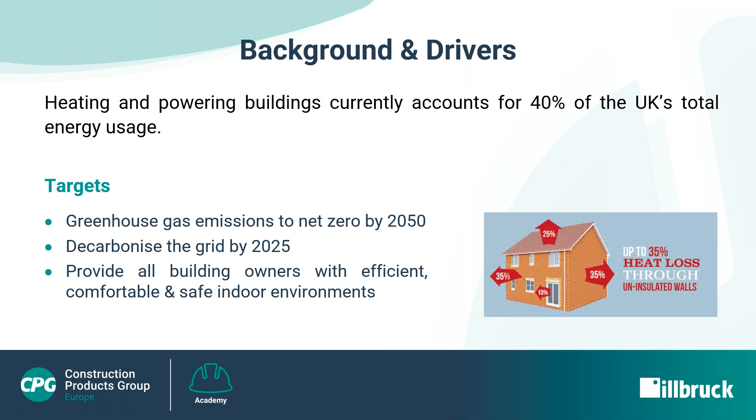The consultation was completed over 12 months ago and addressed the above issues and included the need for the new ADO. The timescale is geared to the 2050 target for net zero. In order to control these measures, the future homes standard for domestic dwellings and future buildings standard relating to non-domestic buildings, existing dwellings and overheating in new residential will be implemented by 2025.

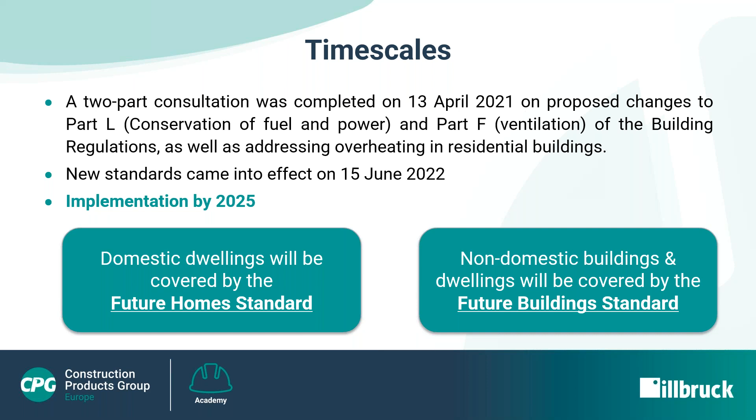The interim approved documents seek to avoid having to retrofit any new homes built during this period to comply with 2050 requirements and to ensure industry is ready to meet the new standards by 2025 and be zero carbon ready. The new ADL requires new homes to produce 31% lower carbon emissions from the 22 implementation compared to 2013 requirements. Ultimately, domestic dwellings are expected to produce 75 to 80% lower carbon emissions compared to the 2013 regulations.

Although new gas boilers are currently still permitted under Part L 2021, all new wet heating systems such as central heating, radiators and underfloor heating must be designed ready for heat pump systems with a lower flow temperature of 55 degrees centigrade. The timescales for heat pump rollout is currently uncertain due to lack of trained installers and particularly the cost of the equipment. There's also the potential for legislation requiring phasing out and replacement of current HFCs used in these pumps much earlier than originally planned.

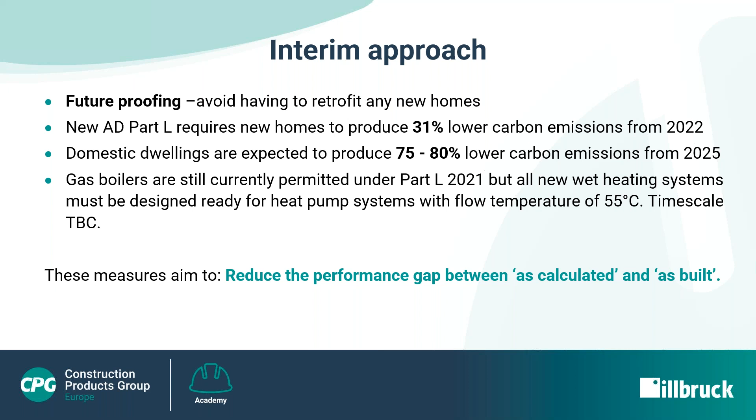These measures also seek to reduce the performance gap between the as calculated and as built, which has up to now led to significant inefficiencies in performance, typically caused by product substitutions and/or inadequate workmanship.

Looking ahead then, the implementation of the future home standard and the future building standard will be by 2025. The new metric for measuring performance under the FHS will be the annual energy consumption in kilowatt hours per square metre per year, with a target of 39 for flats and mid-terraces and 46 for semi-detached and end of terrace. There'll be a concentration on a fabric first approach, not a new concept by any means, but the relevance of this cannot be overstated. We will see the end of use of gas and oil heating for new dwellings from 2025, or more likely later, as mentioned above, as the grid is decarbonised.

Triple glazing will probably be more favoured, however, it will be interesting to see how the glazing market approaches this, as to date, the take-up has been modest, reflecting concerns over additional costs and, ironically, the carbon footprint of 50% more glass. There should be less reliance on bolt-on technologies and the use of inappropriate trade-offs. The design should be appropriate from the start rather than having to consider optional technology at a later date.

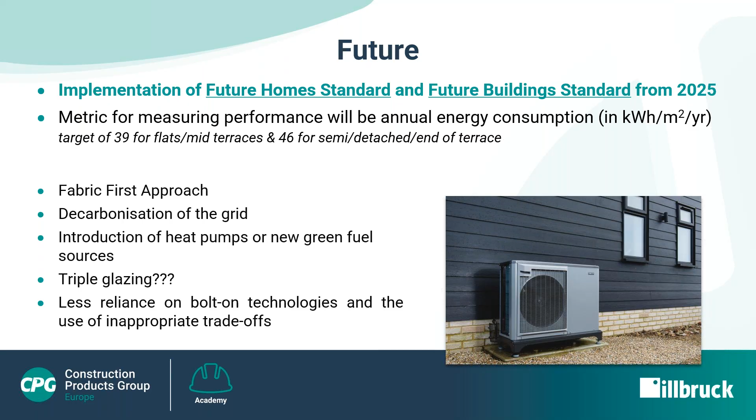Let's look at the approved documents as implemented in June this year. Although all are based on the Building Regulations 2010, they're named as 2021 editions. The new regulations came into effect where notices or plans were submitted after the 15th of June this year. Where plans were submitted before this date, work must commence by the 15th of June next year, with tighter rules on what constitutes commencement. Part F covers ventilation and Part L conservation of fuel and power.

Both are split into two volumes, Volume 1 for dwellings and Volume 2 for buildings other than dwellings. Part F and L cover the requirements for new buildings as well as extensions and renovation work on existing buildings, with some exceptions such as historic or traditional buildings and others. Part F becomes more relevant in terms of ensuring that sufficient ventilation is provided in order to balance the lower air permeability targets in ADL.

New approved document Part O covers overheating and only applies to new residential buildings. This has become more important with climate change leading to higher temperatures, problems associated with more energy efficient glazing, and indeed frequently higher proportions of glass to floor area in new buildings. All of these interact with other relevant approved documents which must also be considered, such as fire ADB, moisture ADC, noise ADE, fuel appliances ADJ, and fixed building services, which is ADK and M.

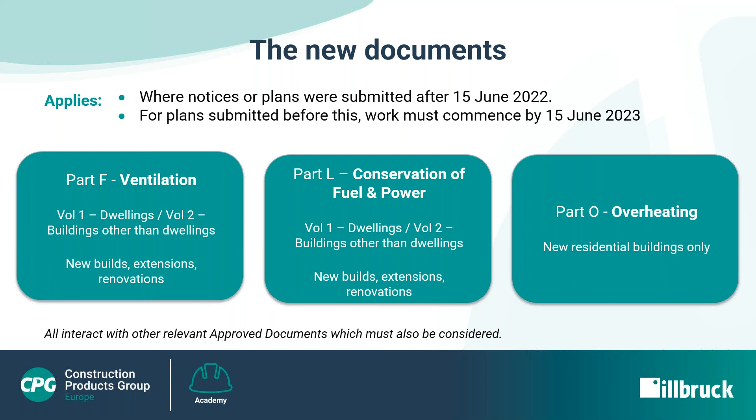The main contractor or developer will need to provide user guides for the building owner, which are clear and non-technical, covering operation and maintenance of relevant equipment fitted to the building. Photographic evidence of the construction for key elements and detailing, such as thermal bridging, interfaces, etc., will be required, which are timestamped with a geographical location. Products which will subsequently be covered within the fabric of the building will need to be photographed immediately following installation.

The issue of a Building Regulations England Part L, or BREL, compliance report will be necessary for every individual building to confirm both the design and as-built performance. The as-built compliance report is signed off by the developer. The photographic evidence and the BREL report is used by energy assessors to produce energy performance certification, known as EPCs. The BREL report is submitted to the building owner and building control department.

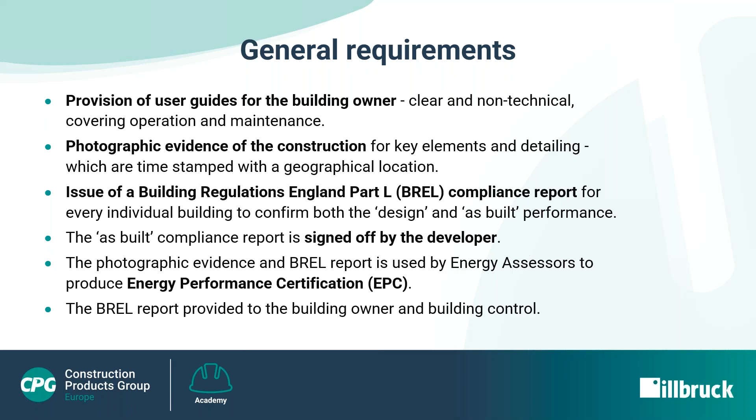So the main focus of this presentation is on ADL, conservation of fuel and power. ADL is issued in 2 volumes, as we heard, volume 1 for dwellings, volume 2 for buildings other than dwellings. New buildings must be deemed to be nearly zero energy. Minimum energy performance requirements for new dwellings are calculated based on the target CO2 emission rate, which is TER, in kilos of CO2 per annum. These are influenced by the fabric of the building and the fuel used for heating.

Target fabric energy efficiency rate, the TFEER, in kilowatt hours per square meter per annum, influenced by the fabric only. And then target primary energy rates, TPER, in kilowatt hours per square meter per annum, influenced by the fabric and fuel. Calculations are carried out using the standard assessment procedure known as SAP for dwellings, or simplified building energy modelling, which is SBEM, for non-dwellings. The actual rates must not exceed the target rates based on calculations at the design and as-built stages.

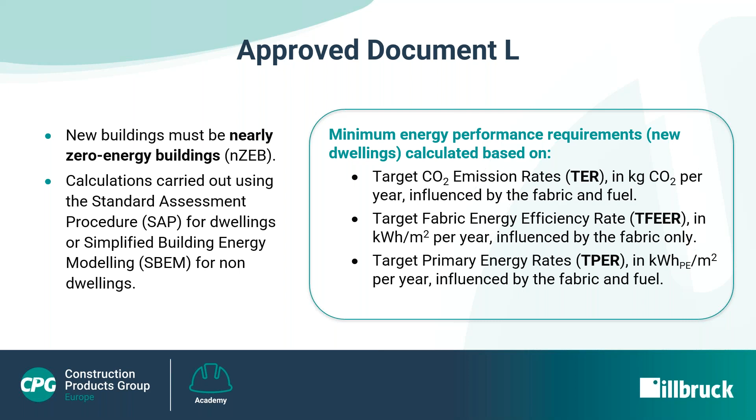The building must be built to a minimum standard of total energy performance evaluated by comparing the actual dwelling against the theoretical notional dwelling for the same size and shape. All individual dwellings are now tested for airtightness at 50 pascals and the introduction of a new pulse test at 4 pascals. There are no additional benefits in the SAP calculations for airtightness levels below 3 cubic meters per hour meter squared. This is to balance with the ADF ventilation. Airtightness below this will lead to a requirement for MVHR. Calculations must be undertaken before work starts using design values and confirmed using as-built information, including details of any specification changes and the measured airtightness values.

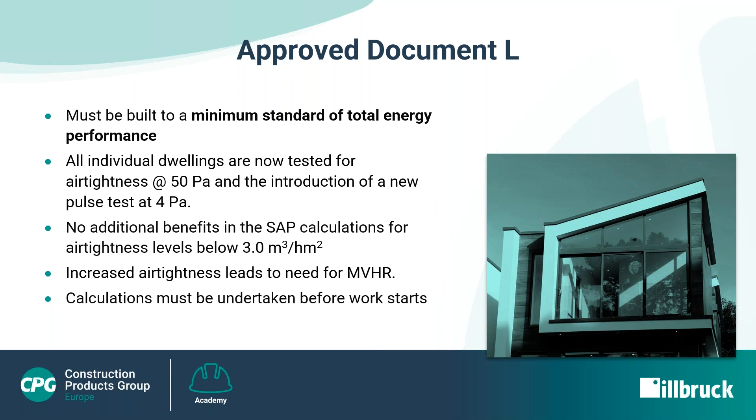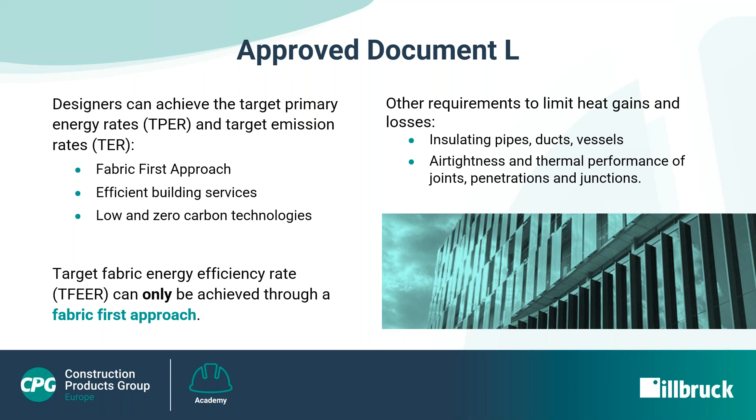Designers can achieve the target primary energy rates, the TPER, and target emission rates, TER, in a number of ways. From fabric energy efficiency, the fabric first approach, efficient building services, controllable and well commissioned to limit the consumption of fuel, low and zero carbon technologies such as solar, wind, water, geothermal and biomass. The target fabric energy efficiency rate, the TFEER, can only be achieved through the performance of the building fabric, i.e. fabric first approach. Other requirements exist to limit heat gains and losses, such as insulating pipes, ducts, vessels for space heating and cooling, and hot water services. Also from heat loss through the fabric, including airtightness and thermal performance of junctions, penetrations, and interfaces.

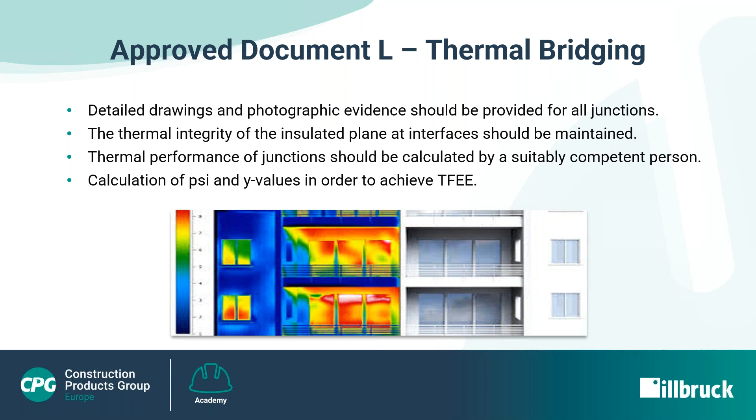The building fabric, including windows and doors, should be constructed so that thermal bridging is limited and detailed drawings and photographic evidence provided for all junctions. The thermal integrity of the insulated plane at interfaces should be maintained. The thermal performance of junctions should be calculated by a suitably competent person, and it will not be feasible to use default Y values. The calculation of specific psi and Y values will be necessary to meet the TFEE.

In improving airtightness, the aim is to reduce unwanted heat loss through air infiltration, for example, via cracks, joints, and penetrations. When installing windows and doors, these should be well fitted and reasonably draft-proof. The tolerance around a window or door unit and the surrounding openings should be minimal, and an insulation material of low thermal conductivity used to fill the gap. BS 8213-4 is a code of practice, which includes guidance on this.

As stated in ADL, to ensure continuity of the air barrier, window and door units should connect to the primary air barrier and should be taped to surrounding structural openings using air sealing tape. Compressible seals or gun sealant may be used to supplement taping. Vapor control layers should be overlapped and be taped at junctions and edges, for example, continuity of the main AVCL and the window interface. Drawings should detail the position, continuity, and extent of air barriers. On a plan of a building, it should be possible to draw a continuous line around the building envelope to define the airtight line.

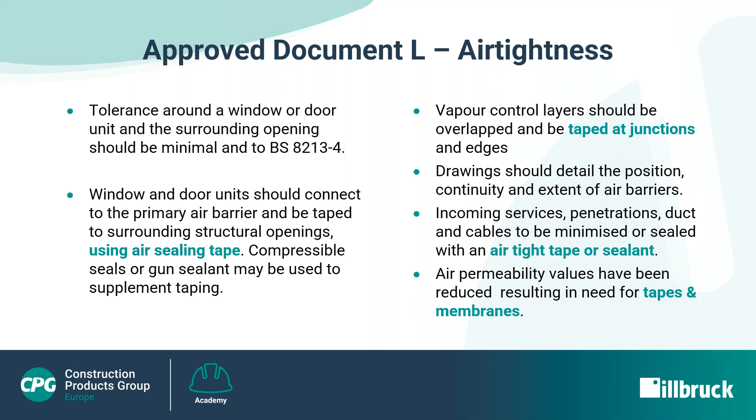Incoming services, penetrations, ducts and cables to be minimized or sealed with an airtight tape or sealant. And there's been a reduction in air permeability limiting values from 10 to 8 cubic meters per hour meter squared, which is still relatively easy to achieve. But in reality, it's more likely that the notional value of 5 cubic meters will be applicable, resulting in the need to use tapes and membranes. This table shows limiting values in the previous ADL and the revised version. The U values for windows and doors have reduced from 2 to 1.6. The reduction in air permeability is also shown from 10 to 8, as we've just heard.

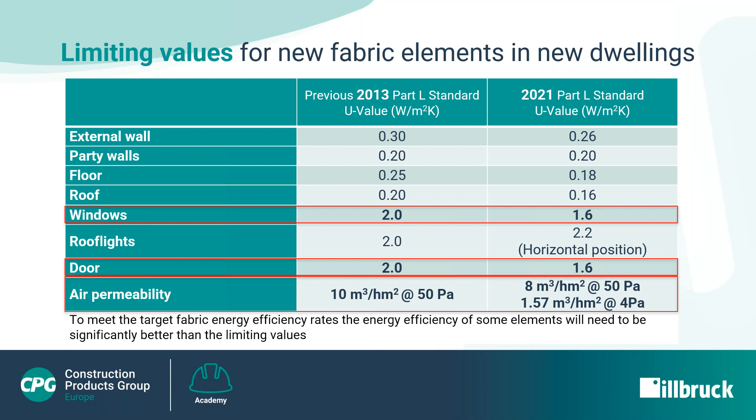The notional building figures are indicated here, where we see the lower air permeability, even lower at 5 cubic meters, and the U values for windows gone down further to 1.2, with indicative FHS requirement of 0.8. Clearly, these are significant reductions.

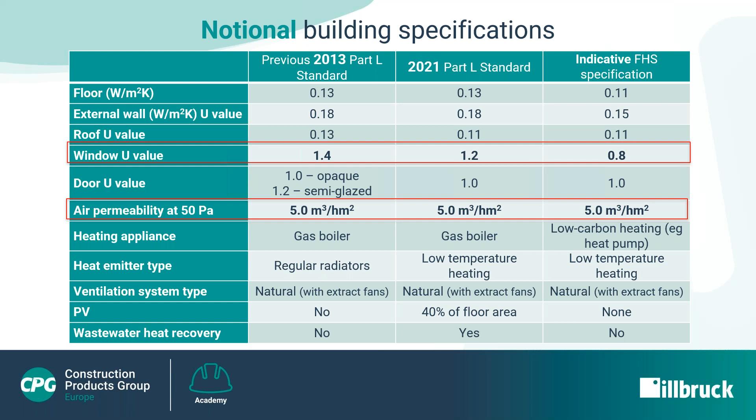Now we can look at which CPG products are appropriate where the requirements of the new ADL have to be met. The illbruck, Dryvit and Nudura brands provide wide-ranging solutions for compliance.

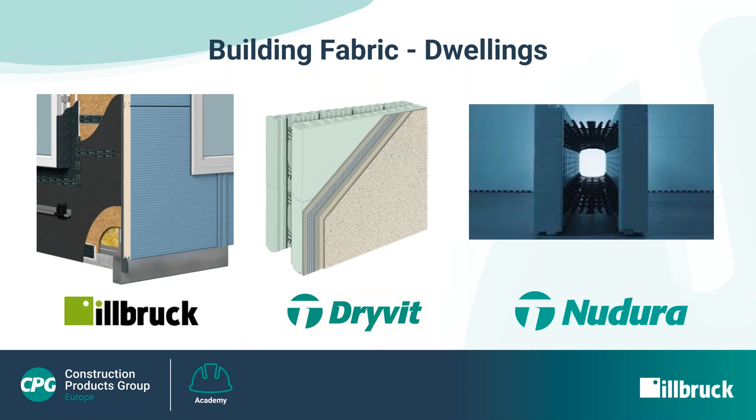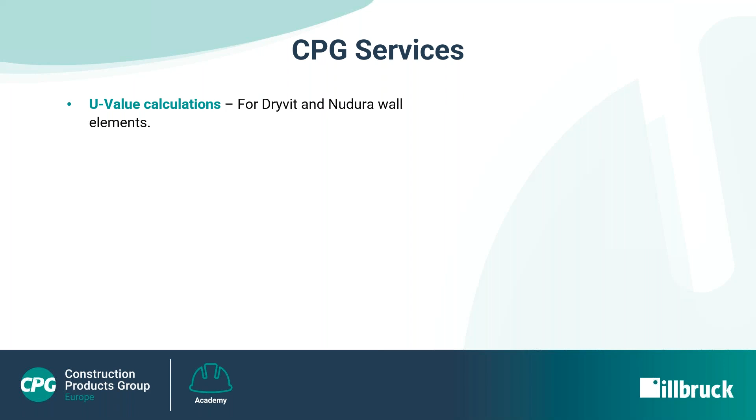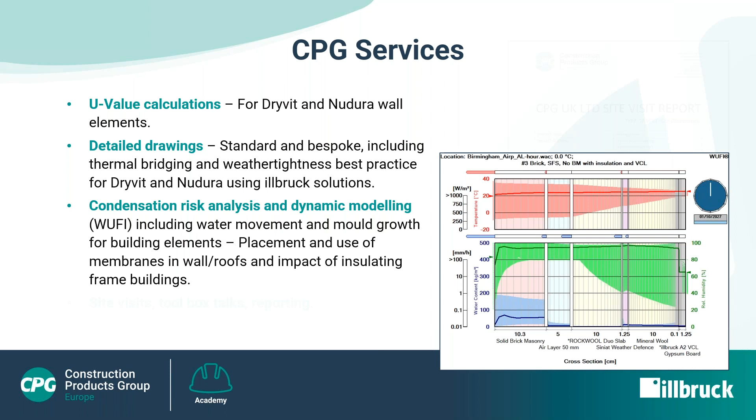But before we focus on product, it's worth noting that CPG offer a wide range of support services, starting from the design stage with U-value calculations and marking up a detailed drawing showing the appropriate location of products. And we can also offer condensation risk analysis via WUFI modelling. When on site, toolbox talks are arranged to ensure full training in the application of products, and site visit reports are written and circulated to relevant parties.

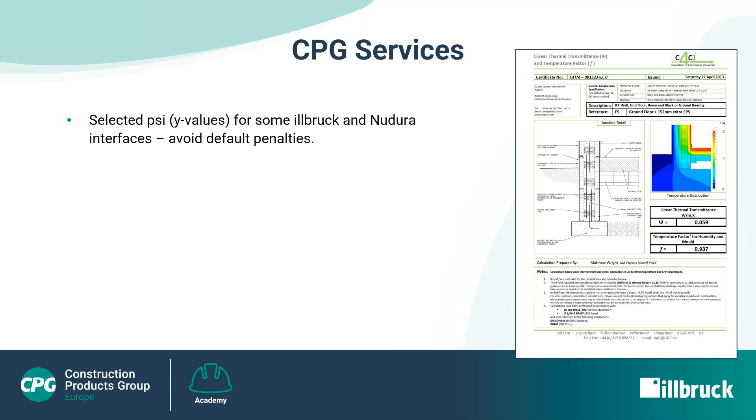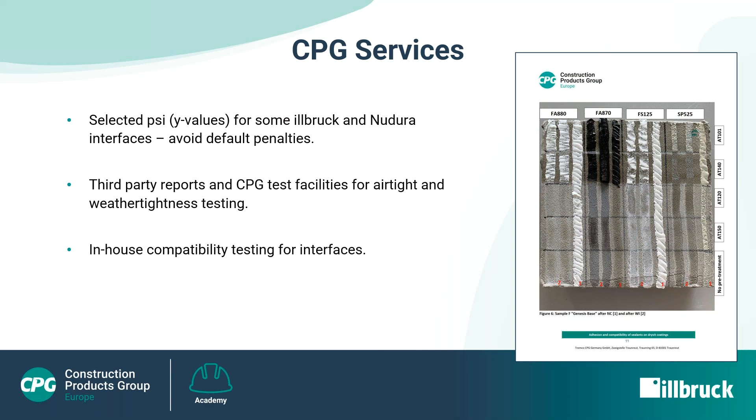We can calculate product-specific psi values to be used in SAP calculations and avoid using lower performance default values. Third-party air and weather tightness testing, including CPG products, is regularly carried out, and we can advise appropriate preparation and correct installation to avoid issues. We also have similar facilities in-house, allowing bespoke applications or R&D to be supported. The Dryvit maintenance guide for EWIS is an example of the documentation which supplements the technical data sheets and website information.

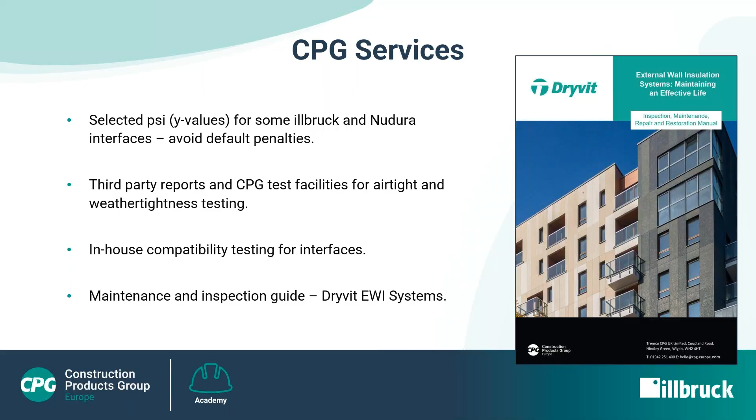And now we can look at some of the illbruck product solutions. From the facade itself, where breather membranes and vapor control membranes are required, to the interfaces at windows and doors, the continuity of the required seals are ensured by the use of illbruck products. The i3 system provides a 3-in-1 perimeter seal, including weather and air tightness and insulation. The use of well-proven products like impregnated tapes and foams enhances the thermal properties of window joints and prevents thermal bridging. Further products are in development, including Class A2 and B breather and AVCL membranes.

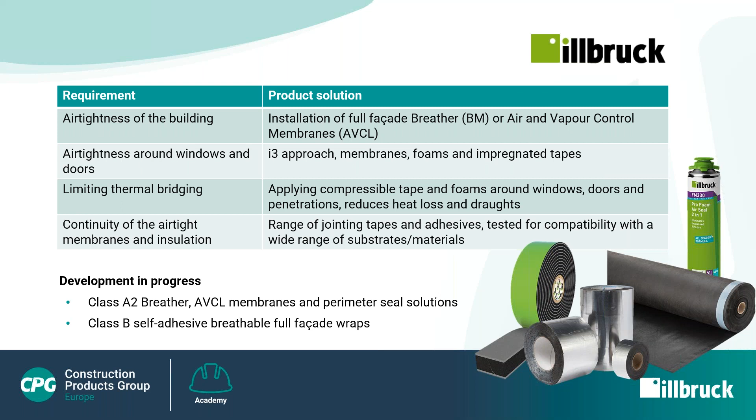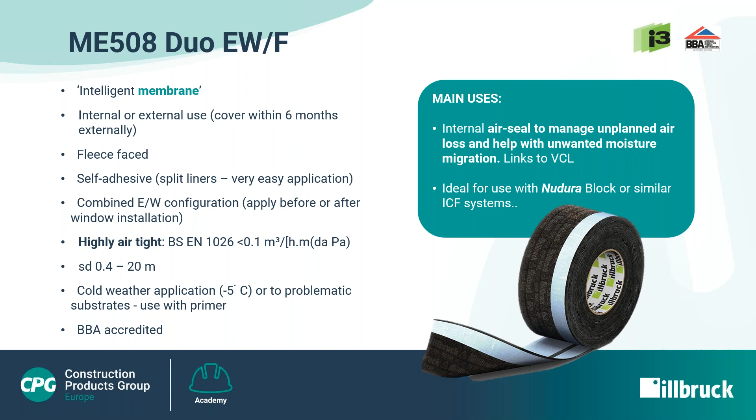ME508 is an example of the type of product which is now recommended in ADL and ideal for sealing the internal perimeter of windows and doors. Application is easy using the self-adhesive backing and split liners. ME508 provides air tightness well below the required levels and is easy to apply and has also BBA accreditation. Here we see some applications of ME508 in conjunction with other products such as ME003 vapor barrier and ME317 internal membrane tape.

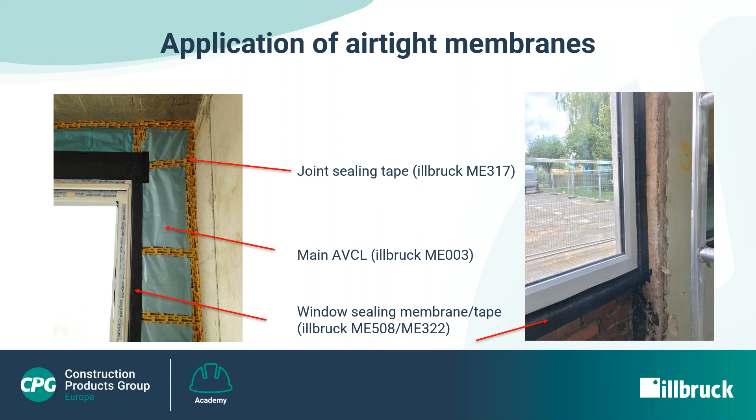Where compliance with ADB fire safety is applicable, ME480 provides a solution for the internal airtight seal, which is also Class B and complies with the reaction to fire requirements. This membrane is fully self-adhesive with a butyl backing and has an aluminium foil finish, which provides a water, air and vapor tight seal.

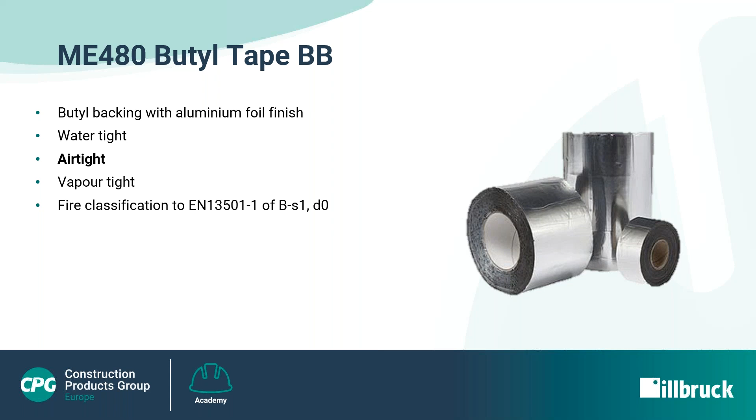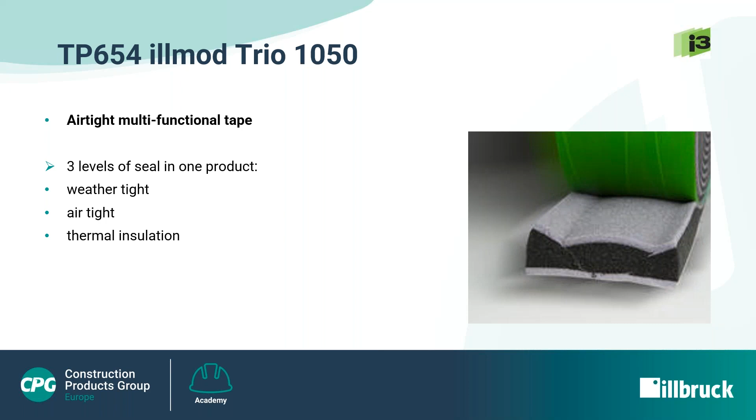Air tightness around window and door perimeters can also be achieved in combination with weather tightness and thermal insulation in one application using TP654 Trio. This is a variation on the illbruck i3 system concept. TP654 provides driving rain resistance up to 1050 pascals, combined with a high level of air tightness and insulation, both thermal and acoustic. It's possible to seal gaps from 6 to 25 millimeters with just 2 sizes.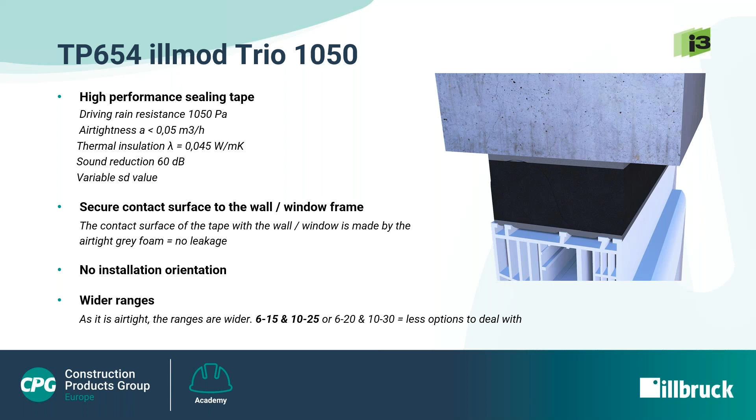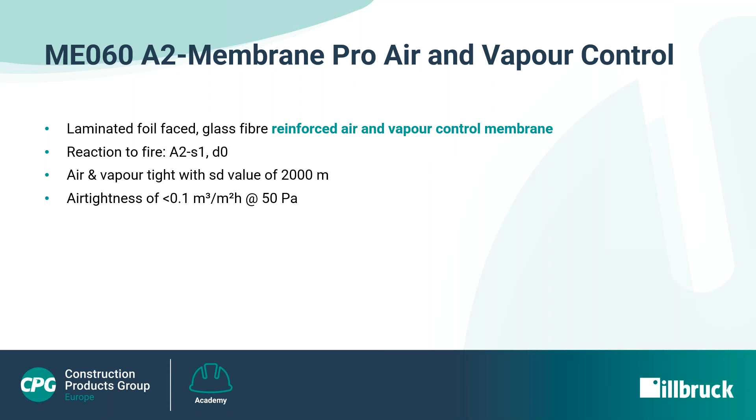For a full AVCL application and in compliance with ADB, ME060 has the required performance, being class A2-s1,d0, with an extremely high vapor resistance and very low air permeability. ME322 is an air and vapor tight tape for sealing window and door interfaces and linking with the AVCL to the internal wall.

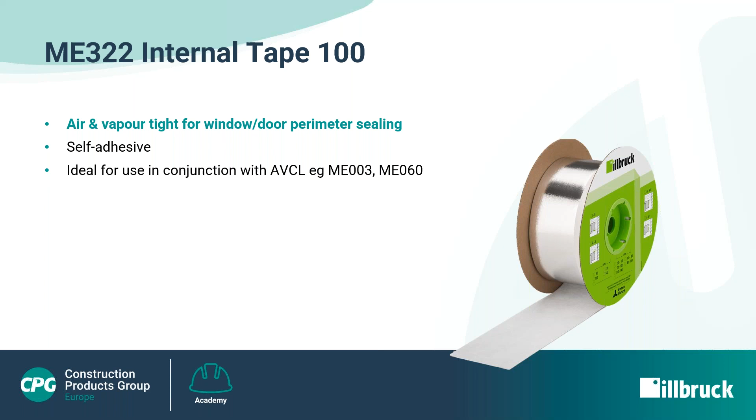Dryvit EWIS are perfect when adopting a fabric first approach for both renovation and new build. The U values achieved meet the new ADL and the FHS. The Roxsulation Pro system is ideal in meeting the need for increased insulation thicknesses, resulting in lower U values.

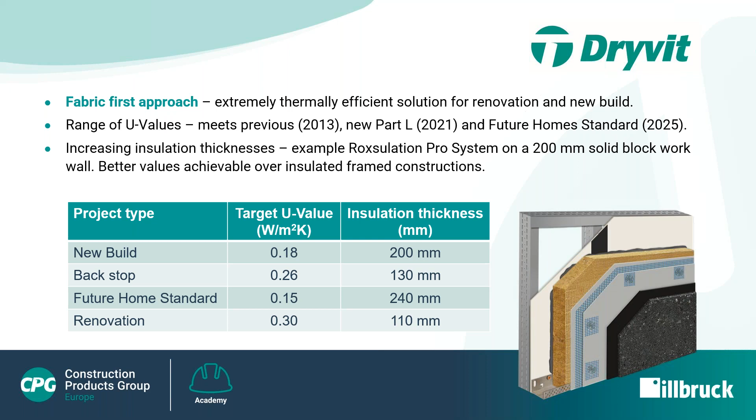Again, the fabric first approach is achieved by Nudura ICF systems, where the new U value for walls is met for both limiting and notional specifications. Similarly, the new air tightness requirements are achieved with less than 3 cubic meters performance, comfortably under the new notional target of 5 cubic meters. In order to meet the more challenging FHS U value requirement of 0.15, a new thicker block is in development.

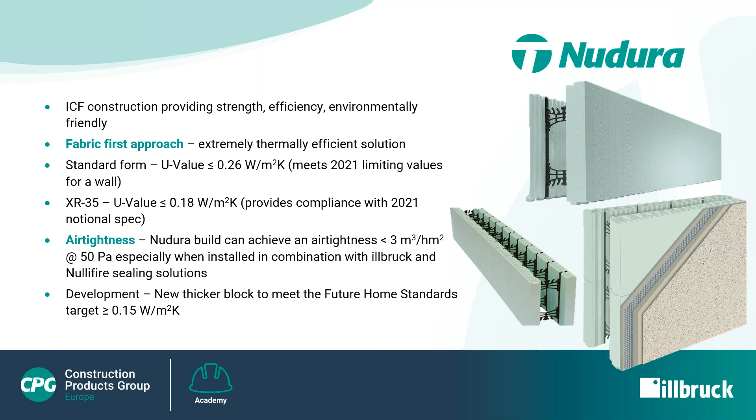Now that concludes the overview of the recent changes.